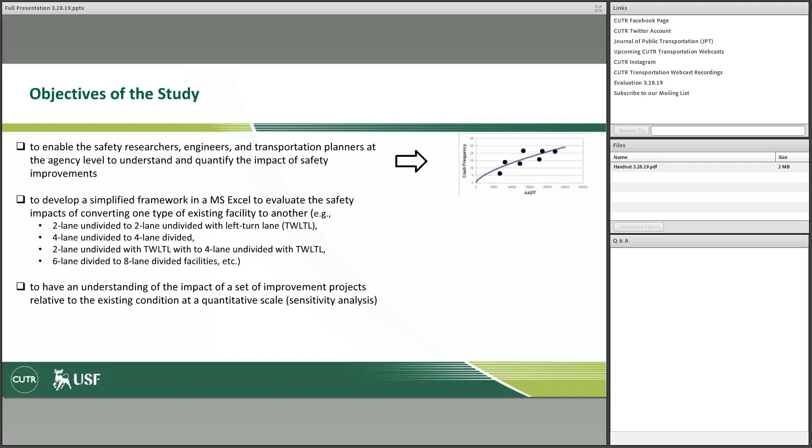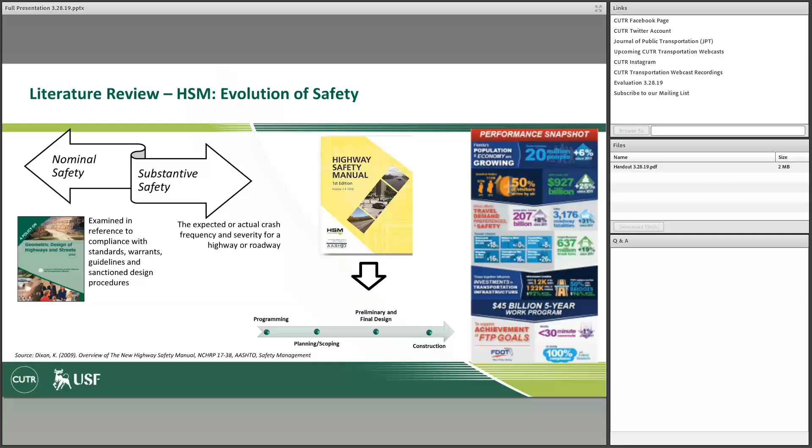And the Highway Safety Manual is one of the major milestones where we document the process and practice, and the methodology is well established over the years, and also those methodologies and the practice are getting embraced in the project development process, and it is being implemented in different parts of the country. Different states are very aggressive and very progressive in terms of accepting the Highway Safety Manual in their project application.

So Highway Safety Manual integration: as many of you know, there are 4 steps. In the system planning level, it identifies the needs and programs the projects to identify the sites where the safety improvement will bring the highest benefit, identify the target crash pattern, and prioritize some of the expenditure in terms of improvements. So this safety planning is more of the application of part B.

And the second one, project planning and preliminary engineering. Here at this phase, it tries to identify the alternatives and choose the preferred solution, and also try to attach that with the target crash pattern, evaluate the effectiveness of the countermeasures, and compare the frequency of crashes between the alternatives. So it is still the application of part B.

In the third stage, design and construction, here we apply the part C methodology, predictive methodology, where we evaluate the performance measures impacted by the design changes and assess the potential changes in the frequency by design exception evaluation. And the fourth stage identifies the operation and maintenance in terms of modification of existing conditions to maintain and improve safe and efficient operation. So it is again a combination of application of part B and C.

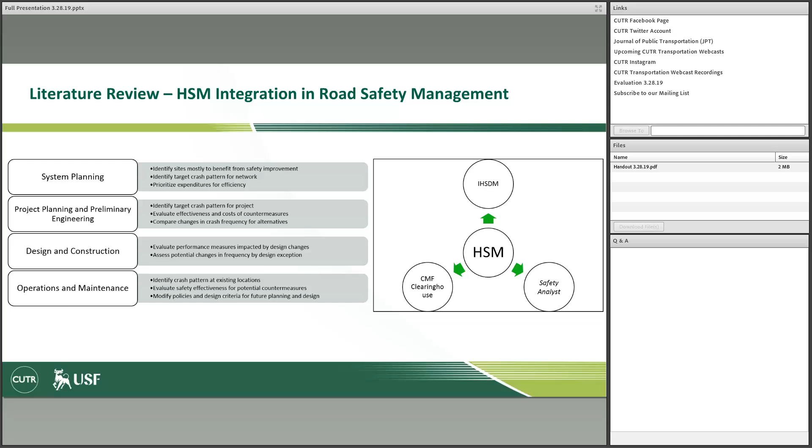So in terms of Highway Safety Manual application, there are multiple software and platforms for the predictive safety assessment. As many of you are familiar with the IHSDM, Safety Analyst, and CMF Clearinghouse, part of the predictive safety process and the application repository.

The supporting data for the predictive safety assessment tool, I simplified it to the PSAT. There are multiple data that correspond to the operational and the geometry. From the segment aspect, we look at particular types of facility, for example 2U representing the two-lane undivided, 3T representing the two-lane undivided with two-way left turn lane, 4U representing the four-lane undivided, 4D is four-lane divided, 5T is four-lane undivided with two-way left turn lane.

Then we collect the segment length, traffic volume in terms of vehicles per day, on-street parking presence, average median width, street light presence, speed limit, number of driveways, distance of fixed objects, and density of the fixed roadside objects.

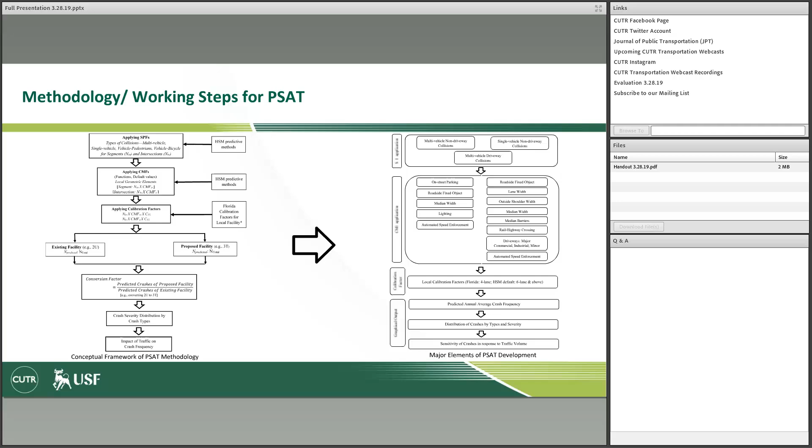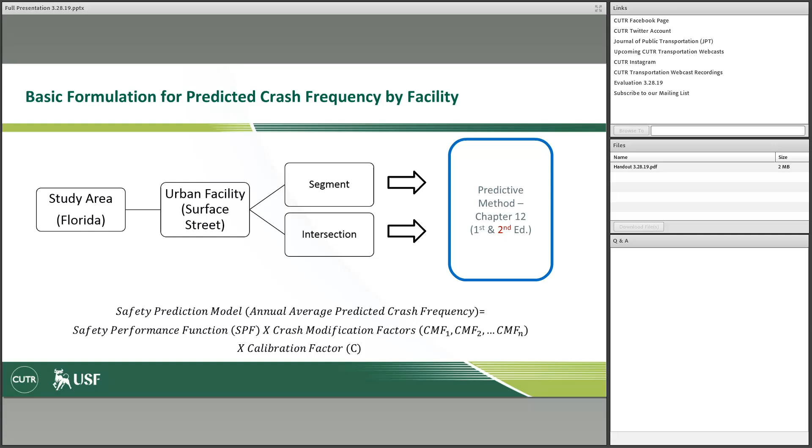And as you see, from the base condition to the improved condition, we consider the widening or some level of geometric improvement that will indicate the conversion from base condition to the proposed condition in terms of predicted crash frequency.

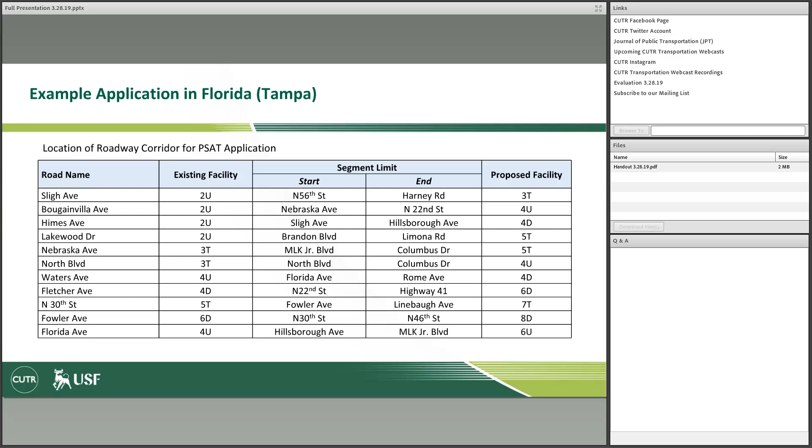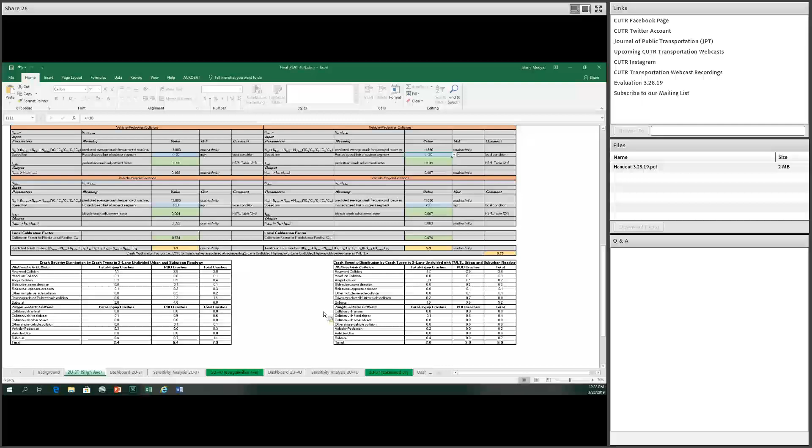Now if you look at the dashboard, this is how it looks in terms of the conversion factor of 0.75. That means if we convert 2U to 3T under the same geometric configuration, we are expecting a 25% reduction of total crashes in the 3T configuration. And this is the distribution of multi-vehicle collisions between 2U and 3T, and single vehicle collisions between 2U and 3T.

And the last part is the sensitivity analysis, where, as I mentioned, there are multiple options of crash types: multi-vehicle only, multi-vehicle driveway, single vehicle only, vehicle pedestrian, and vehicle bike. So if you check off those conditions, you will see only the total crash frequency. And with this sliding bar, you can change the traffic volume level, and you will see the changes in the total crash prediction for both of these facilities.

So one of the interesting things with this sensitivity analysis is the crossover, where the two lines cross each other. That means their safety performance is very similar under a different set of geometric, different values of traffic volume. So it is an interesting implication for the safety engineer and the transportation planner.

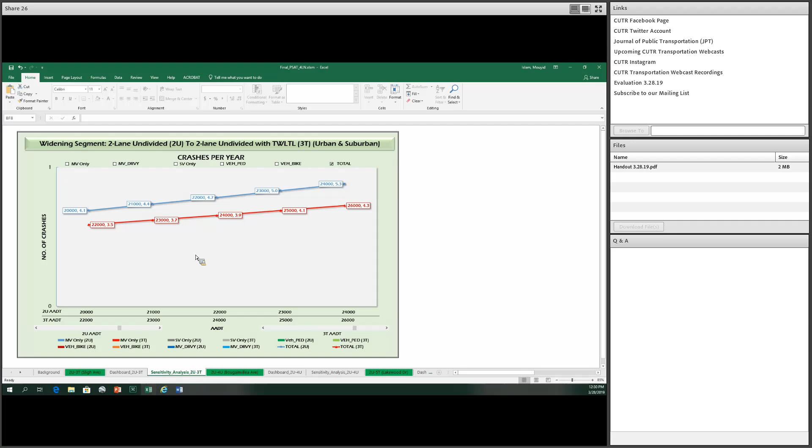And the traffic volume data is collected from the Florida online traffic volume data, and the geometric configuration is collected from Google Earth, as I mentioned earlier. So you see that there is a different response in terms of safety for both facilities. And this is how we calculated all of these facility conversions based on the PSAT tool.

There are some facilities that were not found in the Tampa area. Maybe they are not in the urban area, maybe more in suburban to rural areas. So those are theoretical values. We set reasonable values for both facilities in terms of their traffic volume and reasonable geometric configuration. So that's why they are noted as theoretical.

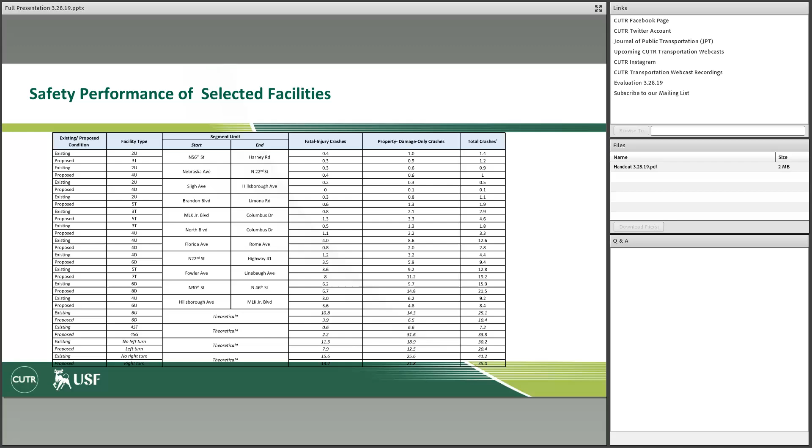That implies some of the coefficients or SPF parameters are very much a reflection of the particular operational characteristics of those facilities. For example, here we have 4SG, 4-leg signalized control, converting from 4ST.

When we convert from 4ST to 4SG, there is a huge increase in the crashes, and that is the nature of the 4-leg signalized intersection because of traffic volume and so many other operational factors that impact this coefficient in the SPF, and that's how it's reflected with higher values in the conversion factor.

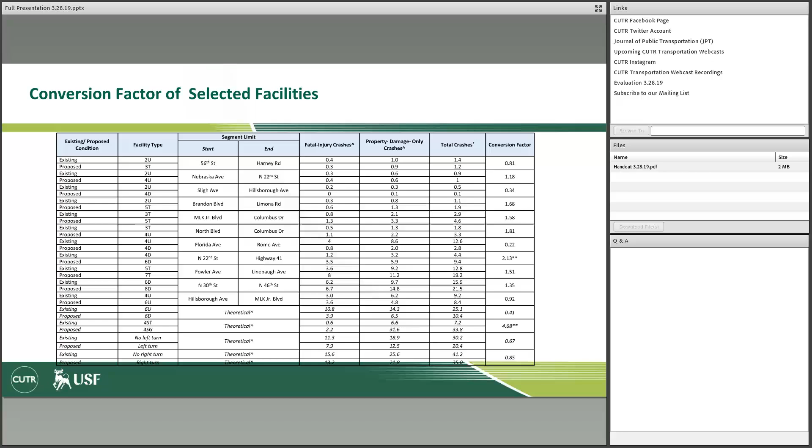So this is just a display of the conversion factors with respect to the no-change horizontal red line. Here we observe that different facility conversions have different implications in terms of predicted crash compared to the base condition.

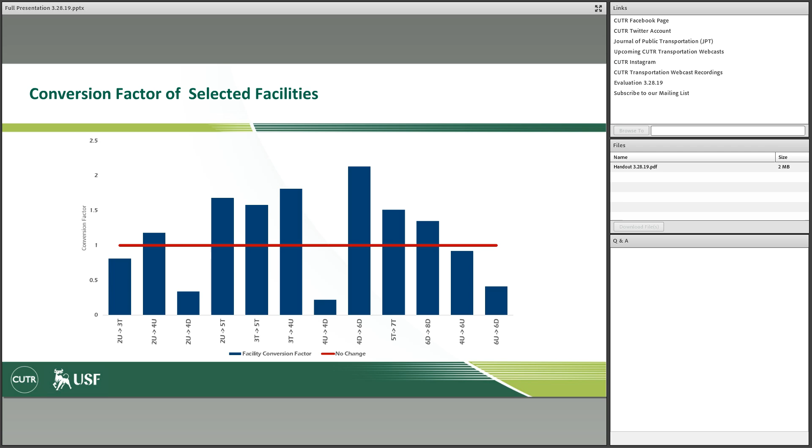For example, 2U to 4D, we are expecting much lower crashes in the 4D facility. 4U to 4D, we are expecting quite different, quite low numbers of crashes in the proposed facility. So this is just a graphical way to explain the conversion factors with respect to the baseline of no change.

So there are some caveats associated with this tool. Development of calibration factors for 6 lane and above was not scoped in this phase of the study, and the FDOT documents and earlier research reflected only 4 lane and below.

So we captured those calibration factors, but not for the 6 lane, since that was not in scope for this study. Later on we can update the values, but at this point it's a default value of 1.

One-way roadways are not included in the analysis. Some one-way roads, especially in NCHRP 17-58, showed urban areas with many one-way roads, but in this analysis we excluded them just to show the major roadway facility conversions.

Two-way left turn lanes at 6-lane roadway intersections were not part of the improvement, because some of those left turn lanes, due to traffic volume and operational advantage, are provided there. So we have not included the two-way left turn lane conversion.